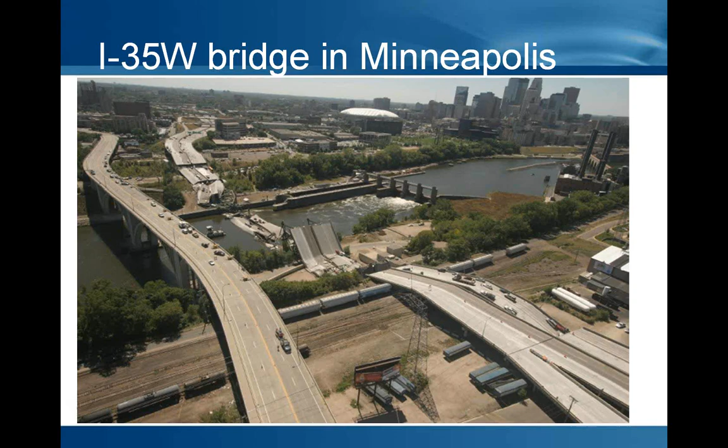Here we are, you see on the right hand side the collapsed bridge. A few numbers about the old bridge: it was opened to traffic in 1967, and was scheduled for reconstruction between 2020 and 2025. Interestingly, the first reports of damages, in this case cracking in the approach spans, are dated 1997. From this time they repaired and kept monitoring the discovered damages. During the collapse, 13 people died and 145 were injured.

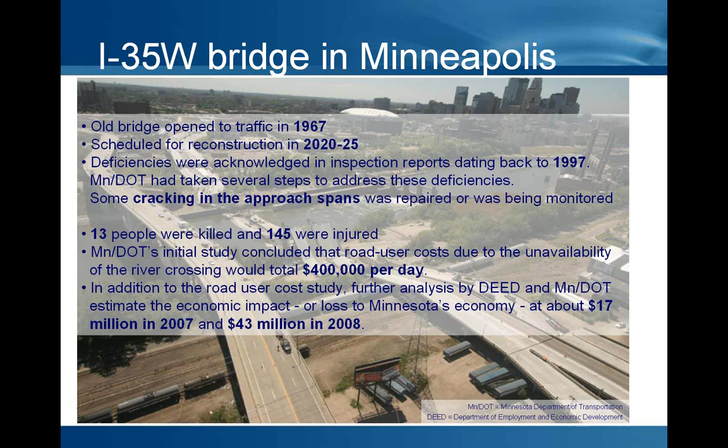The Minnesota Department of Transportation calculated a cost of approximately $400,000 per day due to non-availability of the bridge. Additionally, the Minnesota Department of Transportation and the Department of Employment and Economic Development estimated the economic losses for Minnesota's economy at approximately 17 million for 2007 and 43 million for 2008.

The next slide shows a few other pictures of the collapsed bridge, and on the top left side you see a picture of the old bridge.

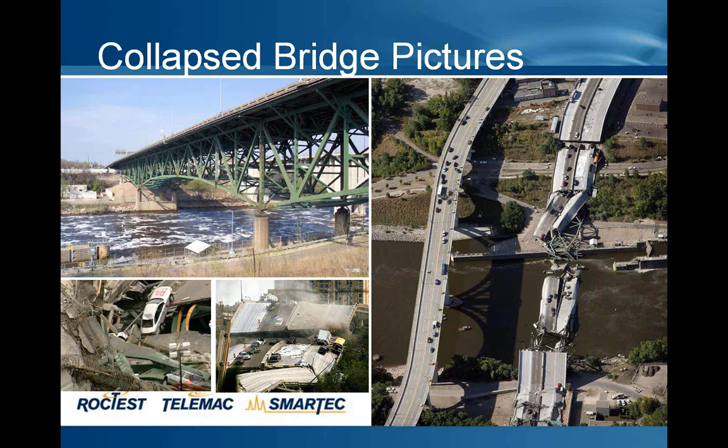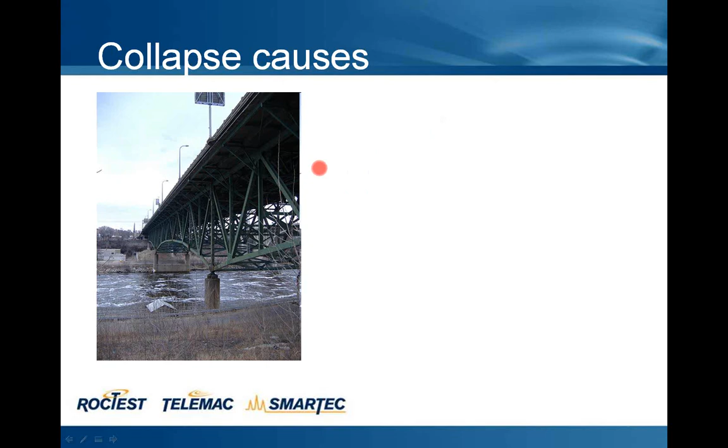Here we go. Concerning the old bridge and the causes of the collapse, the first examinations seem to identify fractures in the gusset plates as the main cause of this collapse.

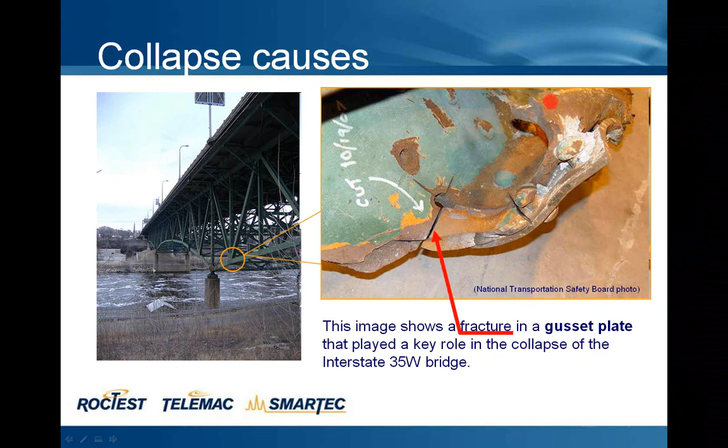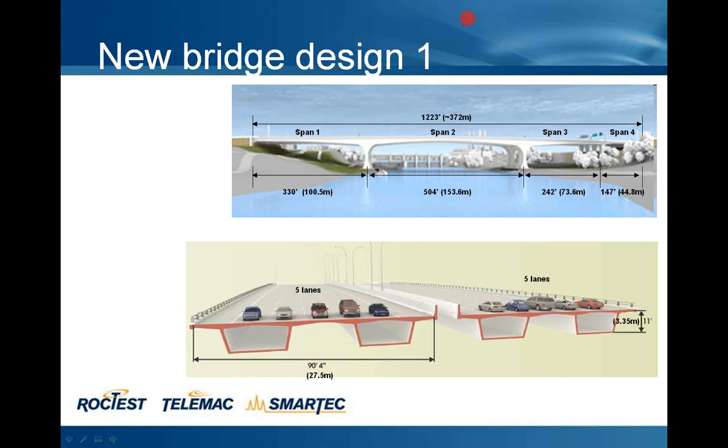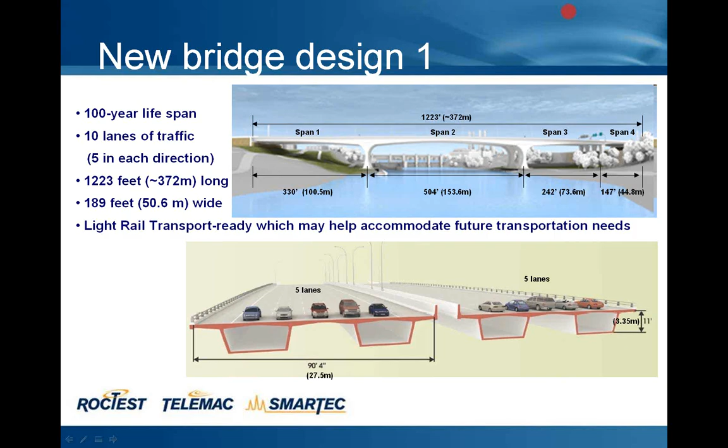The design of the new bridge started immediately after the collapse event. The new bridge foresees 4 spans for a total length of approximately 370 meters. The longest span is span number 2, with a length of about 154 meters. The new bridge is designed for a 100-year lifespan, has 10 lanes of traffic - the 2 twin bridges have 5 lanes each. The bridge is approximately 51 meters wide, and it's ready to accommodate future light rail transportation on the external lanes.

The next slide shows a few other pictures of the new bridge in the design phase.

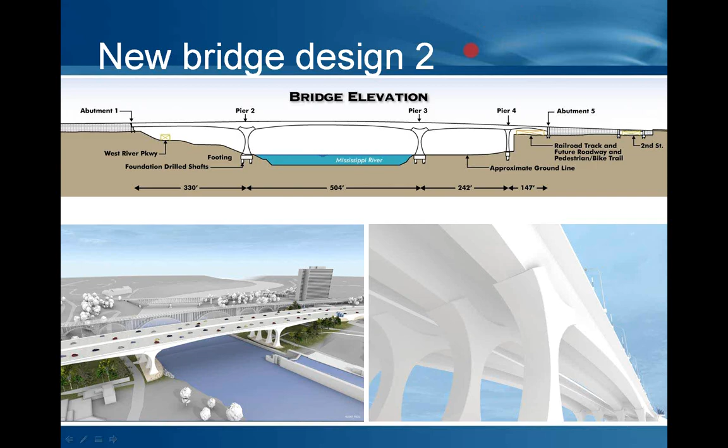As I said, the new bridge was opened to traffic in September 2008, I believe on the 14th of September. It was built in a record time of 339 days from the beginning of the project to the opening.

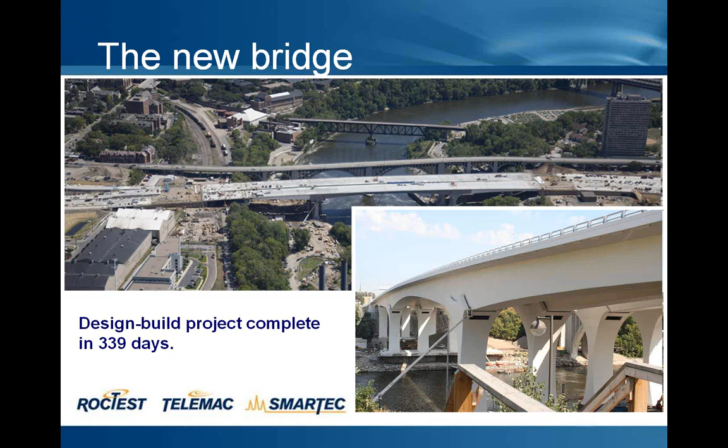It's important to note that this is one of the first examples where the instrumentation of the bridge was designed and defined since the very first design stage, with the cooperation of many different actors. In particular, all the entities involved in this construction project were also involved in the definition of the monitoring system to be installed in the bridge.

The designer, the contractor, the owner, the University of Minnesota as a research institute, and the SMARTEC group, along with a few other companies delivering and installing the different sensors and systems, worked in strong cooperation to design a system fitting the true needs of such structural health monitoring instrumentation. These needs were included in the bridge bidding proposal, in the bridge design, in the bridge executive plans, and also in the fast construction planning.

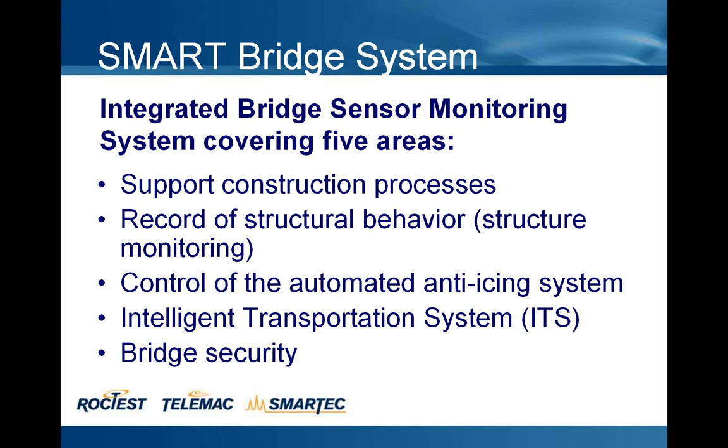So we are really talking about a smart bridge, where the sensor monitoring system was really integrated into the bridge, covering 5 different areas: the support during the construction processes; the record of structural behavior, the true monitoring of the structure; the control of the automated anti-icing system installed on the bridge; the control of the intelligent transportation system; and the bridge security.

Many different kinds of sensors were installed in the bridge, starting from strain gauges for local strain monitoring, local curvature, and concrete shrinkage and creep monitoring. Thermistors for temperature monitoring, temperature gradients and thermal strains. Potentiometers on the joints for joint movement monitoring. Accelerometers for the dynamic monitoring of traffic-induced vibrations and modal frequencies. The SenseCore corrosion sensors, presented during the first web seminar, for concrete resistivity and corrosion current monitoring.

And of course, long-gauge fiber optic sensors for average strain distribution along the main spans, average curvature, deformity shape, and detection of cracks. It's important to note that such sensors are optimized also for dynamic measurements.

Currently static measurements are performed using a SOFO V reading unit, but it will be possible in the future to scan and read dynamically the same sensors using a SOFO dynamic unit, for dynamic strain, dynamic deformity shape, vertical mode shapes, and dynamic damping measurements.

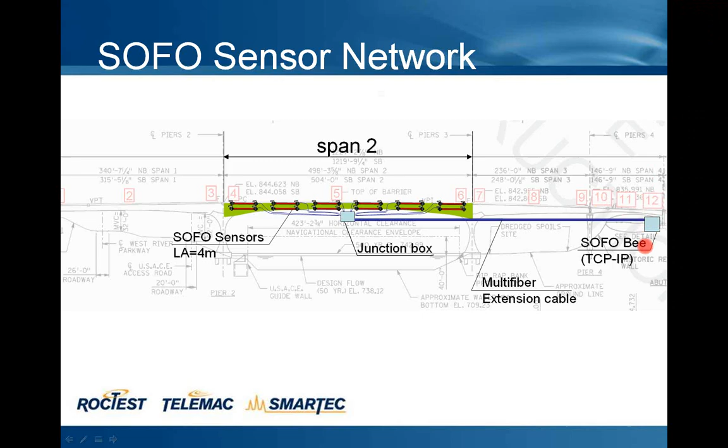All the sensors are interconnected into a junction box installed exactly in the middle of the span, and then with a multi-fiber extension cable, all the signals are pulled to the SOFO Bee reading unit located at the end of the bridge. The SOFO Bee reading unit is integrated into the local LAN, since many other sensors and systems are interconnected into the same monitoring system, so everything is connected to the local LAN. That's why the SOFO Bee is equipped with an additional TCP/IP communication module.

The sensors were protected because we installed them in the very last phases of construction, so there were many activities running in parallel. In order to protect the sensors during the installation phase, we needed to protect the areas, avoiding people stepping on the sensors. Right after installation, all the sensors were protected with ducts.

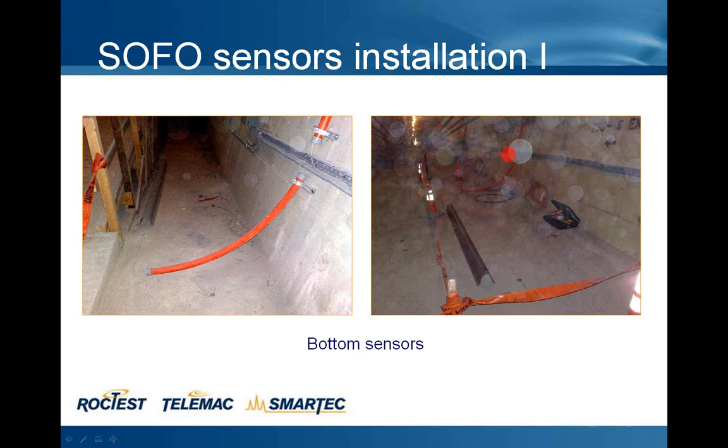All the cables, all the passive parts of the sensor cables, run along the span through ducts. Here you can see one, and here the duct. You can also see that the environment inside the bridge was very dusty.

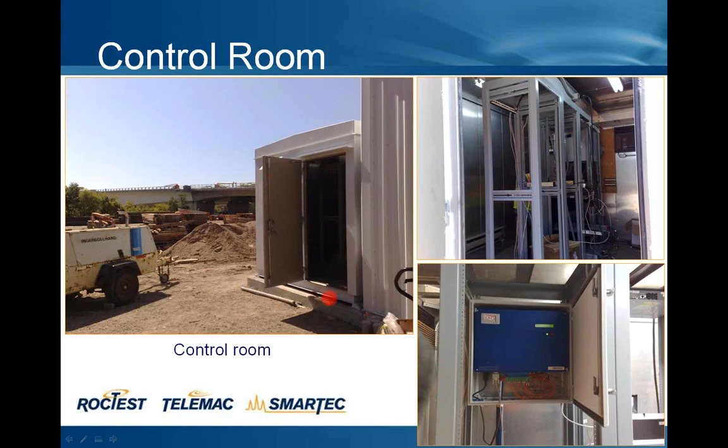Okay, so this is the small container with the control center.

All the sensors - okay, I'll answer a question that arrived. Only one bridge is equipped with the SOFO sensors. The southbound exterior span 2 is the only span equipped with the 12 SOFO sensors, while all the other conventional sensors - vibrating wires, potentiometers, accelerometers - are distributed over all the girders of the twin bridges.

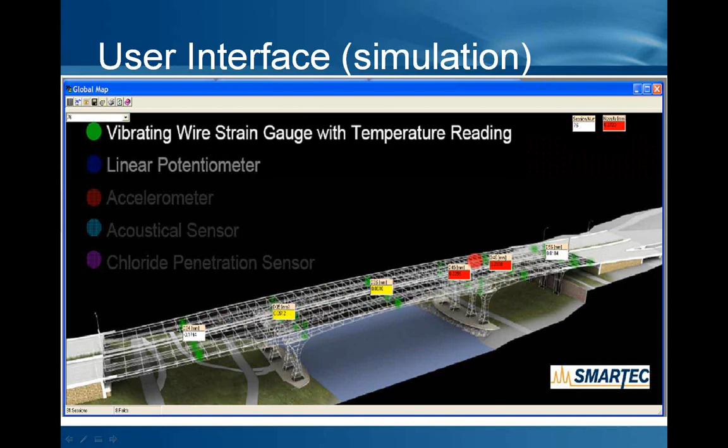All the data are merged into the SOFO SDB, and this slide shows a simulation of what the end user can see. On the location where the sensors are installed, text boxes show the real-time values of the measurements, and according to the thresholds set for these sensors, different colors mean different behaviors.

I will also show you a few results from the first day, right after the installation and before the opening of the bridge. The upcoming slide will show 6 days of continuous hourly measurements of the SOFO sensors.

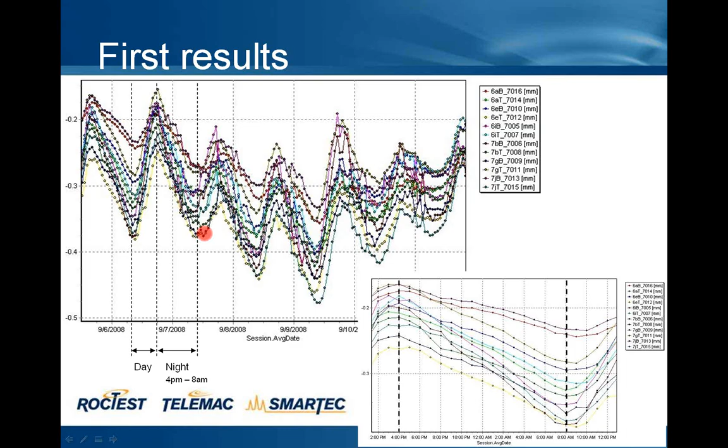Before the opening of the bridge, load tests were performed. This screenshot shows such tests, where in different steps different loads were carried on the bridge using big trucks. The tests occurred at night.

The slide first shows a downward trend of the measurements, as I mentioned before with the day-night cycles - all the sensors show a downtrend, but that's because the test was performed starting at 4 p.m. This acquisition started at 4 p.m., the test itself started around 8 p.m. and stopped at 5 a.m. in the morning. Then you see the different jumps corresponding to the different loads on the bridge. Just note the scale - this is 0.1 millimeters.

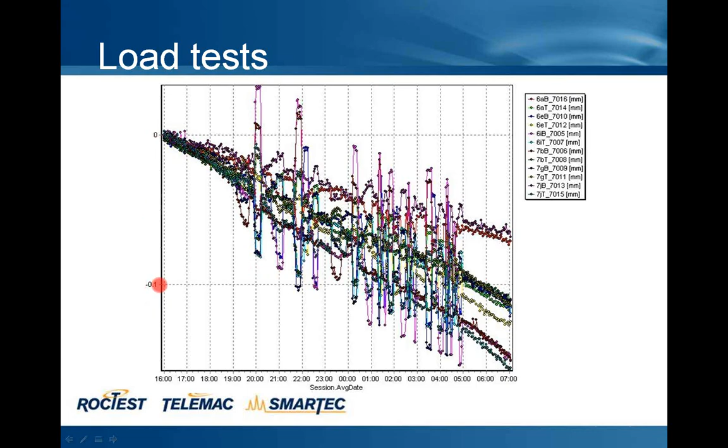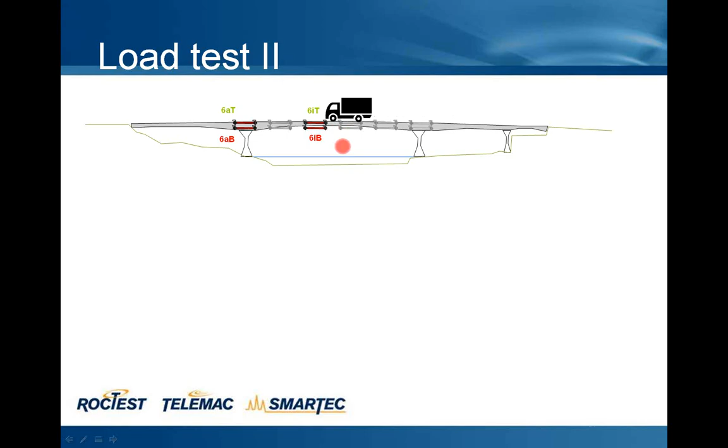Concerning the load test, the next slide shows a side view of the bridge. Here I've put all 12 sensors, but we just focus on two couples: the 6A top and bottom near pier number 2, and the 6I top and bottom approximately in the center of the span. During the load test, different loads were applied on the bridge, and the bridge reacts to this load with a kind of deflection in the mid-span.

This means that, as expected, the top sensor on the pier should get tension while the bottom sensor should get compression. On the other hand, in the center of the span, the top sensor should get compression and the bottom one should get tension.

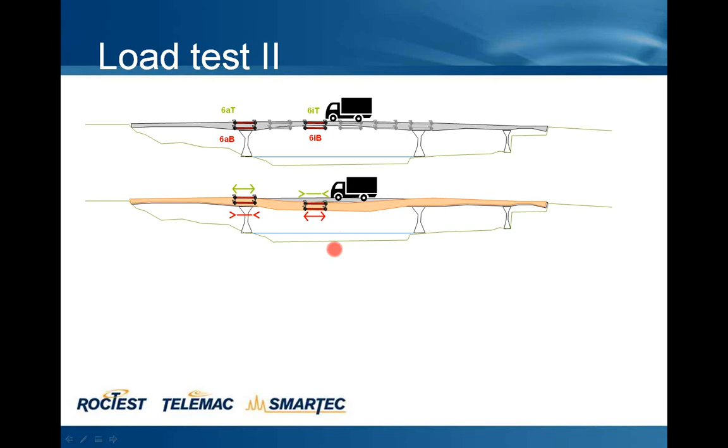And in fact, zooming and focusing on these four sensors, the measurements taken during the load test confirmed this expected behavior. Again, we're talking about very small deformations here - much less than 0.1 millimeters.

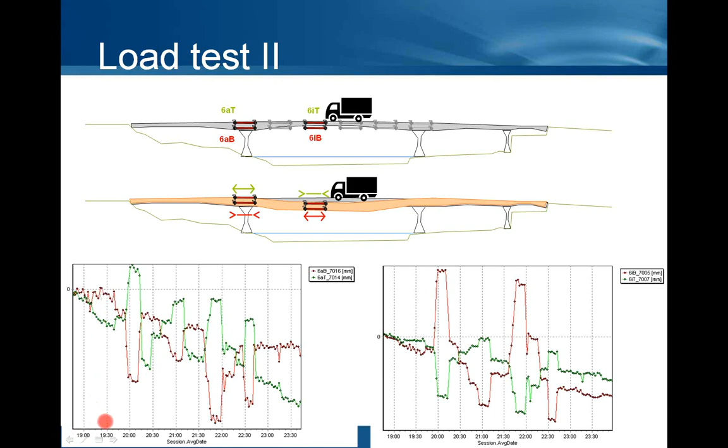So I'm going to end the presentation of this first case study with a few acknowledgements: the Minnesota Department of Transportation, the Flatiron Manson Corporation, and of course the University of Minnesota, which will be responsible for managing the measurements and analysis of the results.

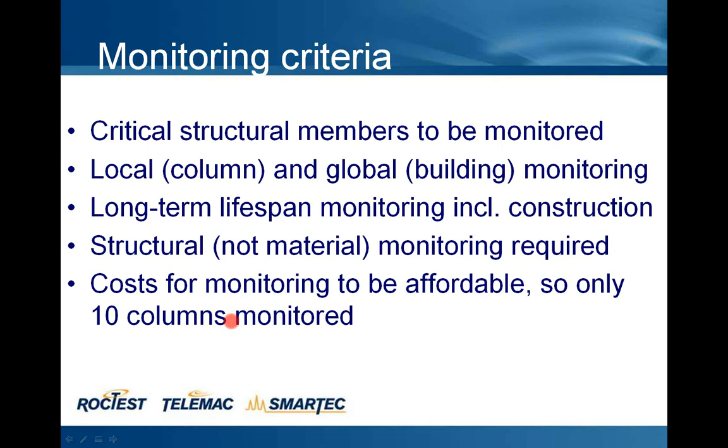In order to keep the costs affordable and low, without affecting the performance of the monitoring system, it was decided to keep only 10 columns in the building. Those columns were selected by the designer of the building as the most critical elements of the structure.

The Punggol complex consists of 6 blocks founded on piles. Here you can see the building in progress, under construction. Every building has 19 stories and 6 units per story. The columns, in the case of Punggol, were cast on site.

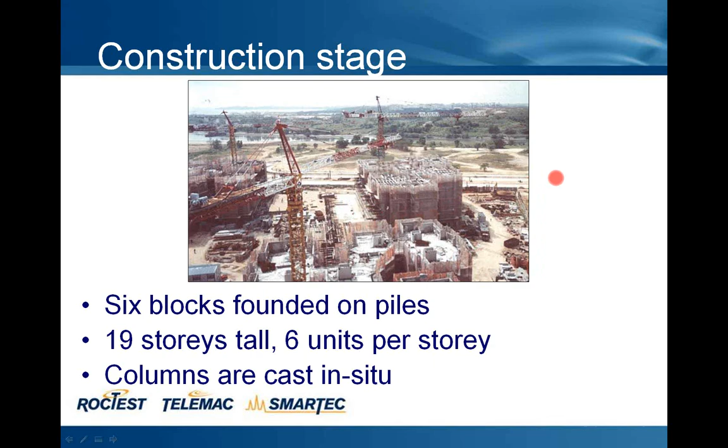But for some other projects, the columns were also produced in the plant, in the prefabrication plant.

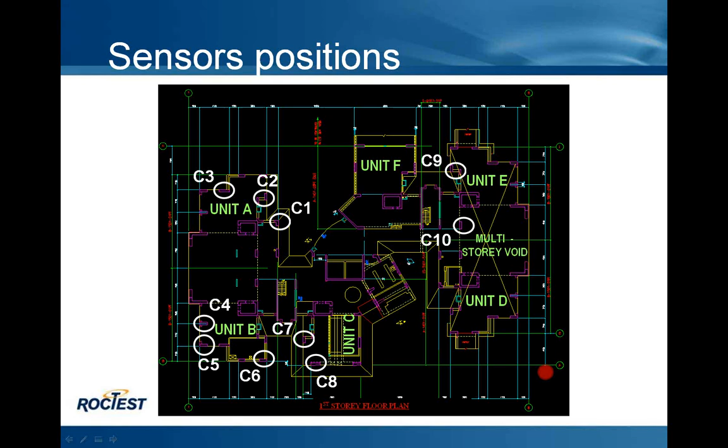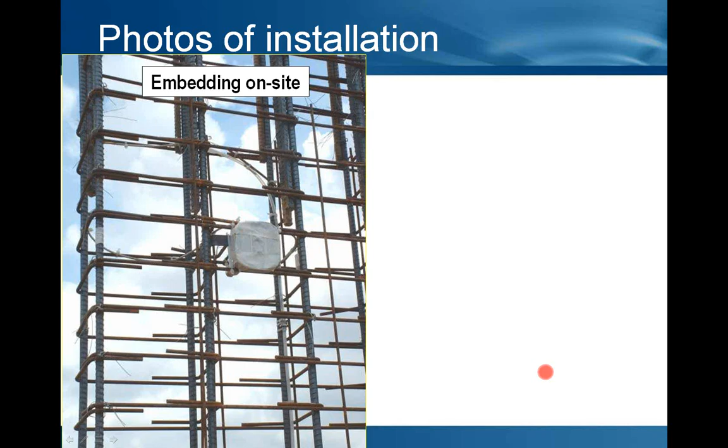A few photos of the installation. As mentioned, here we have the cast-on-site columns, so the sensors were installed in the rebar cages. You can see the SOFO sensor installed on the rebar, then the passive zone going around, entering the junction box. The junction box was protected since it was also embedded inside the concrete.

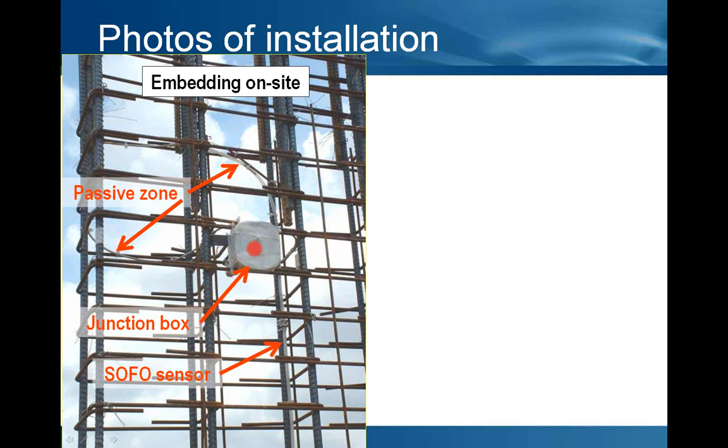As mentioned before, we also have some sensors embedded in the prefabrication plant. The manner of installation is practically the same as shown on the left side photo — it's just that the sensors were attached to the rebars in the plant, then after concrete pouring they were transported to the site. So after pouring, you could see only the junction box with a small window for the connector, and when a measurement was to be taken, this window could be opened and the connector from the SOFO reading unit plugged in.

Like this, we could perform the measurements, which were actually manual measurements. On this project, it was decided, in order to reduce cost, to perform the measurements manually. So campaigns of measurements were performed at regular intervals, but not continuously — every time, someone had to go on site to open this small window, plug in the connector, and perform the measurement.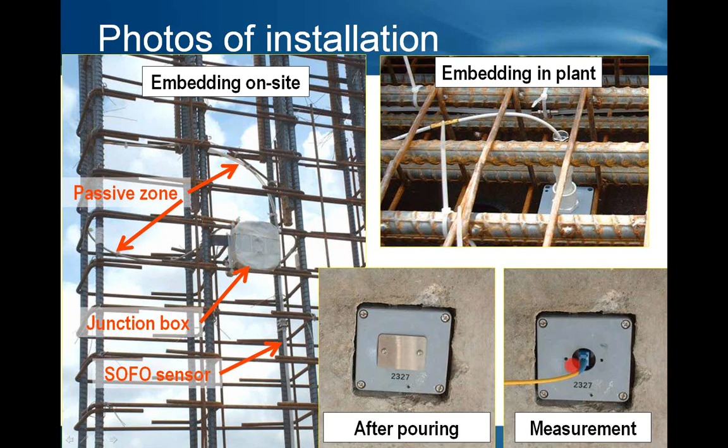Okay, so in the last photo you can see the connector coming from the extension cable from the SOFO, which is plugged inside the junction box. In the next slide, you will see how the completed buildings look like.

So obviously when the buildings are done, they look nice. You can see the blocks of Punggol, and you will also see the operator of SMARTEC's distributor in Singapore, SOFOTEC, performing the measurement on one of the buildings. These are very nice, modern buildings, 19 stories tall. On the right photo, you can see the SOFOTEC operator plugging the sensor inside the box and performing the measurements manually.

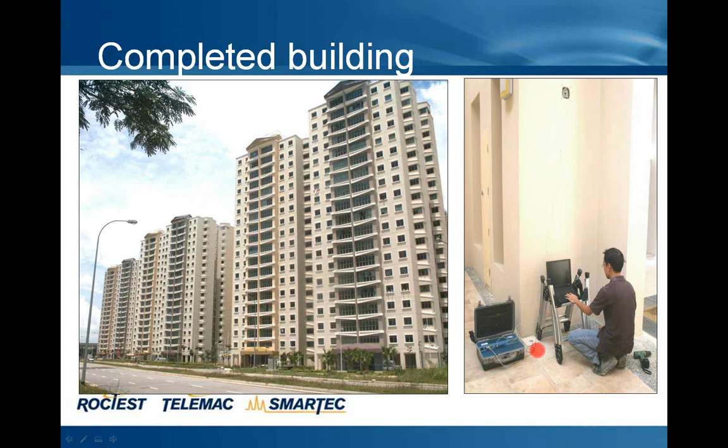So the next slide will show the 7 years of results. This is a very interesting slide showing different stages of the building life.

That's what we expect to see in this diagram now appearing on your screens: during the construction stage we have compression in all the sensors, and it's good to see that most sensors measure practically the same value, or nearly the same value, which indicates that the building is progressing well. That means all the columns are deforming in the same manner.

So for every new story added, one measurement was performed, and this indicates that all the columns settled, deformed, and compressed by the same value - except one column, column C9, which I mentioned at the beginning of the conversation - this void area where the sensors are less loaded because there are fewer stories with apartments.

So once the construction is finished, practically all of the load is inserted into the columns, and what we see evolving over time is mostly rheological effects like creep and shrinkage.

We can see that all the columns continue to deform, but now their values start to be more scattered. At the construction stage they were very close to each other; now they start to be far from each other.

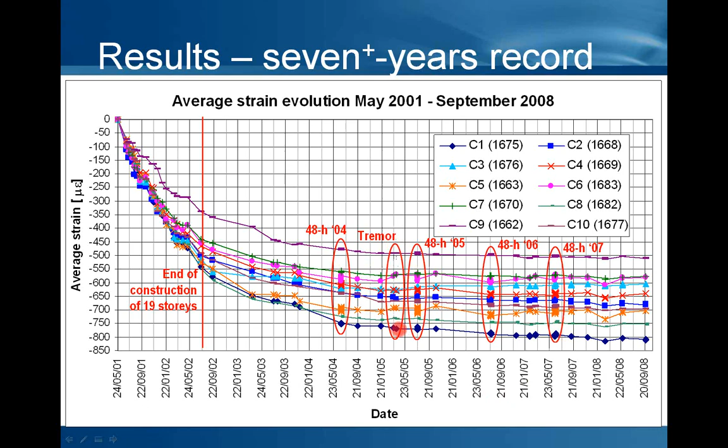And here, in between two 48-hour measurement sessions, there was a tremor that happened due to an earthquake in neighboring Indonesia, and we were able to catch this event and make a post-tremor evaluation of the building. People in the building actually could feel the movement. They called the authorities and asked for an opinion, and we were able, based on our measurements, to give answers about the health condition of the building.

So at the local level, first we made the data analysis based on the fact that sensors measure axial deformation in the columns. We were able to determine the measured strain in the column, and then evaluate whether the strain is acceptable by comparing the measured strain with the estimated value from design. We were also able to compare the measured strain with the ultimate values that are expected.

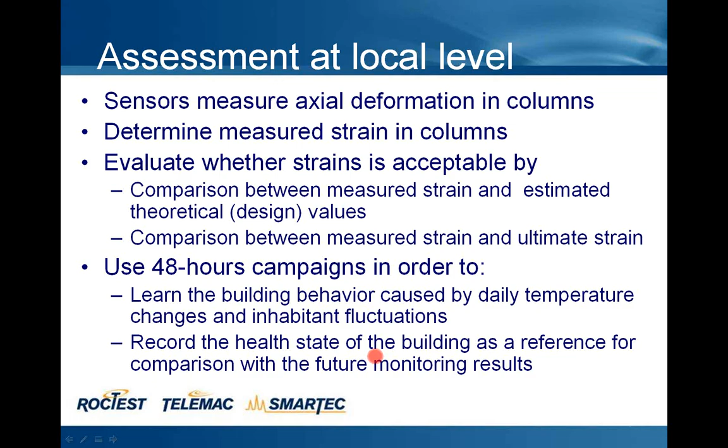We also used the 48-hour campaigns to learn the building's behavior caused by daily temperature changes and inhabitant fluctuations, and to record the health state of the building now, while it is in good condition, to use this as a basis for the future.

So average strain measurement by sensor, using a simplified formula, can be expressed as total strain measured by the sensor equals strain due to the load, or elastic strain in case we are not in the plastic zone, plus creep, plus thermal strain, plus shrinkage.

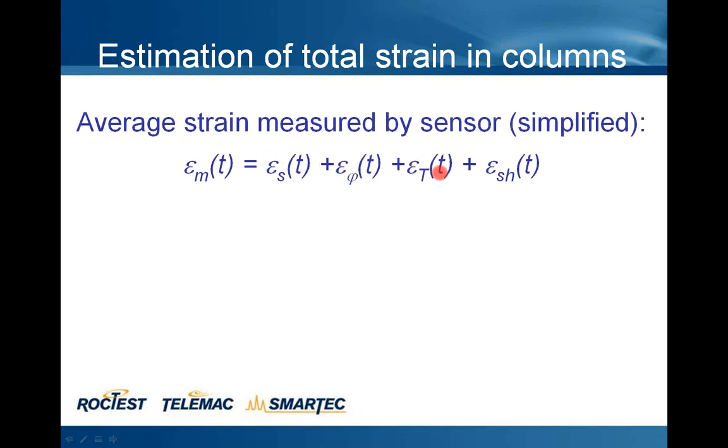It's a kind of simplified formula that applies very well for concrete. In our case, we have thermal strain, total shrinkage, creep, and elastic strain, or strain due to the load.

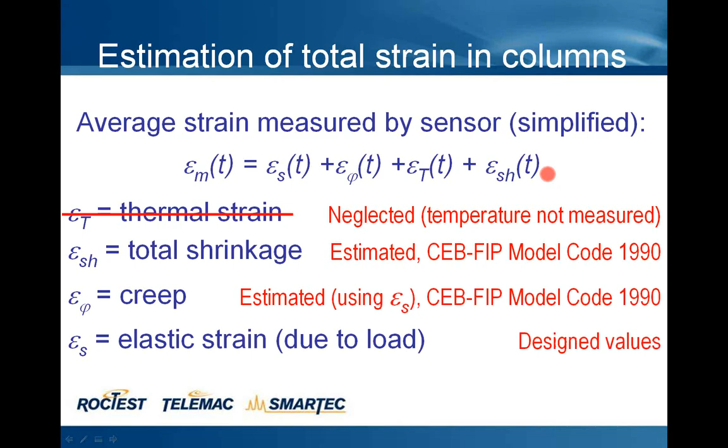In our case, thermal strain was neglected because, as I mentioned, temperature in Singapore was more or less constant, so it was not measured. The total shrinkage was estimated using the CEB FIP model code, and creep was estimated using the same model code. Finally, we used design values for the elastic strain, so practically we were able to reconstruct what is expected, what is designed, and compare that with what is obtained from the sensors.

In the next slide, I will show two comparisons for two columns, C3 and C9, with approximate lines for the first 4 years of monitoring. For column C3, the first line on top is the estimation of shrinkage, then estimation of creep, then estimation of elastic strain based on design, and here you can see the line with the rhombs, that is the theoretical estimation of the total strain evolution, while the measurement of the sensor is presented with the dashed line.

You can see that for this particular column, in the first stage, we had very good agreement between the numerical model and the measurement from the sensor.

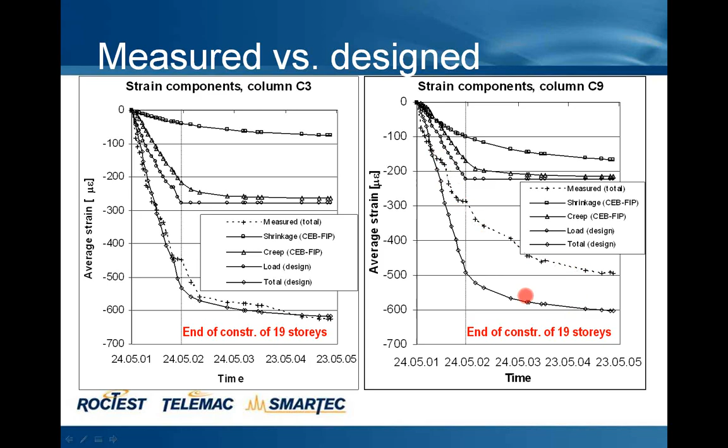But not to show the best example only, let's see another example: column C9, where we measured less deformation than expected. In this case we could clearly see that this column measured less than expected, and probably this column is either over-designed or underloaded. The explanation was found in the fact that there is a void area around this column, and also this column is very close to the core, so it is possible that the core of the building, being much stiffer, is attracting more loads to itself.

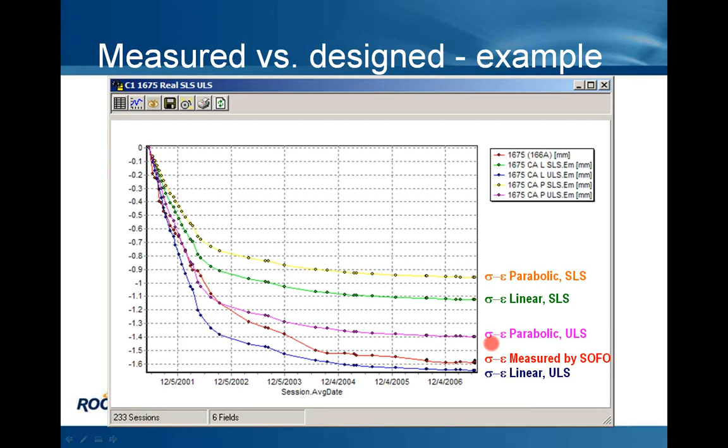The next slide is a 48-hour measurement from 2004, where we can see the fluctuation over 2 days in strain and temperature. Here with the ROMs you can see the fluctuation of strain over 48 hours, and here the fluctuation of temperature. The temperature fluctuation is really very small, and also the deformation is really small, we're talking about less than 20 microstrain all in all.

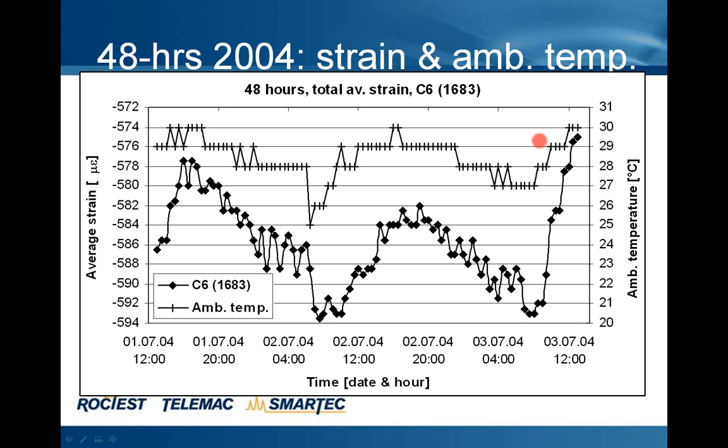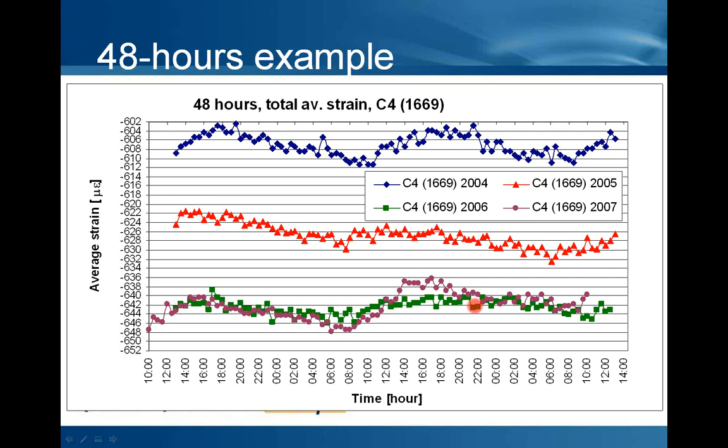Another 48-hour example compares year to year within one sensor, showing the daily fluctuations in 2004, 2005, 2006, and 2007 on the same sensor. In 2004 we have daily fluctuation in the blue line. The year after, we have practically similar results, but the whole line is shifted down because of creep and shrinkage. The same happens the year after, but in the fourth year we have nearly the same measurements as the third year, so the creep and shrinkage are more or less stabilized and don't evolve anymore in a significant manner.

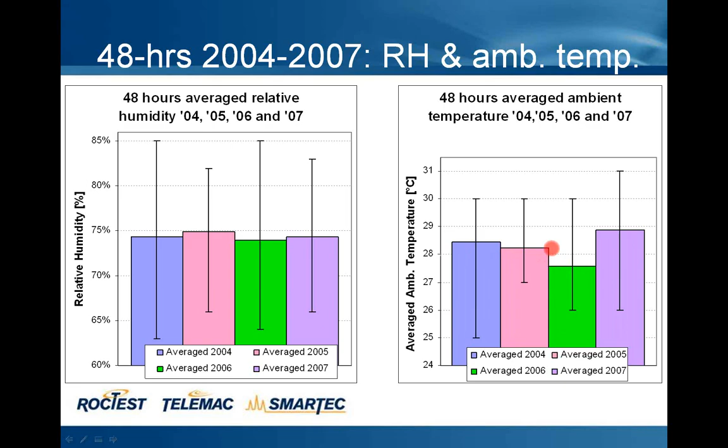I'll jump to the slide showing environmental behavior around the building: the relative humidity and the average ambient temperature, along with maximum and minimum values. Average humidity is nearly the same all 4 years of monitoring, and temperature is also more or less within the same limit, about 28 degrees plus or minus 0.5 degrees average value, so we have pretty constant conditions around the building. Then it was very interesting to see the evolution for every single column, and here we can already see some anomalies in the behavior.

For example, if you look at column C3 presented here, we can see that from year to year the value of the strain in this column is actually decreasing in terms of absolute value. So this column is decompressing, while some other columns are much more compressing, like column C1 and maybe column C2. Some columns are pretty stabilized, for example column C4.

Some of them have big fluctuations depending on temperature, like C6. So you can practically see for each column what is the behavior. Now we'll focus more on column C3 that actually has, let's say, the negative behavior.

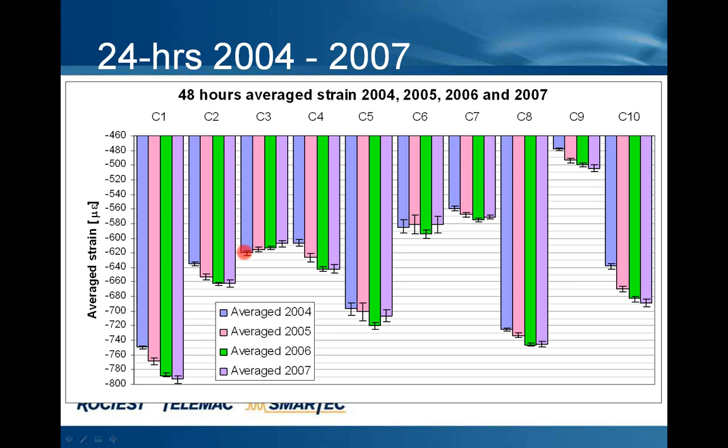We expect the strain to increase in time due to creep and shrinkage, but the strain in this column is actually decreasing. But before we go there, I will just quickly show you the post-tremor analysis that we performed.

As I mentioned, in neighboring Indonesia there was a strong earthquake that was felt as a tremor in Singapore, and we had one measurement performed before the tremor and one performed just after the tremor.

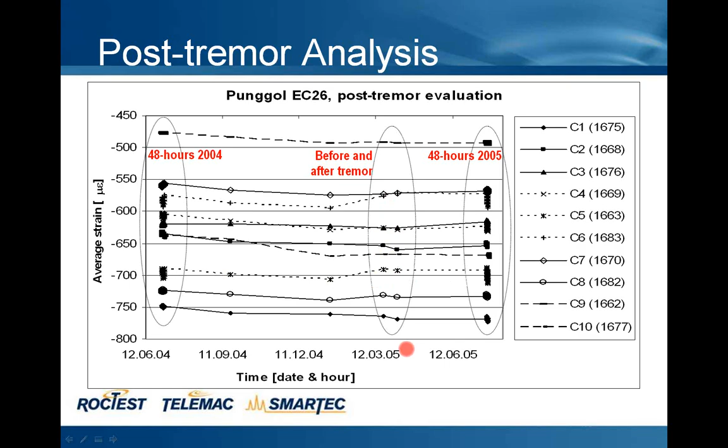We could see that there were small changes detected by the sensors between before and after, but those changes, if you compare with the daily fluctuation in year 2005 and in year 2004, we can clearly see that those small changes are actually within the limits, and we can practically conclude that there is no damage or any influence of the tremor on the behavior of the buildings.

So now we are going to make an assessment on the global level. I will go back to this column C3 that was, let's say, problematic.

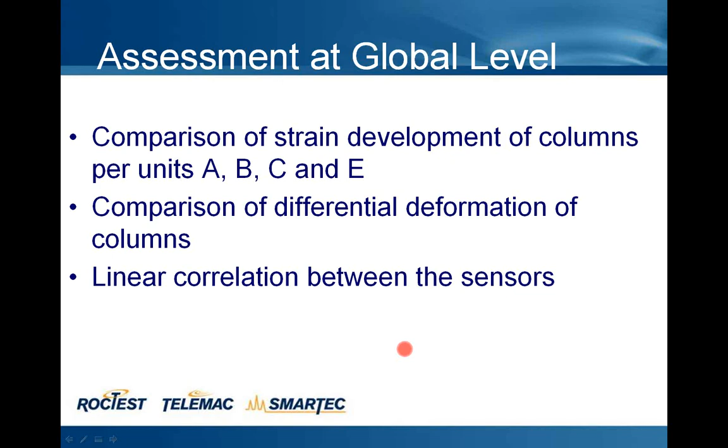What we do is comparison of strain developments in columns per each unit, comparison of differential deformation of columns, and linear correlation between the sensors. Before, we already mentioned that column C9 measured less strain than the other columns.

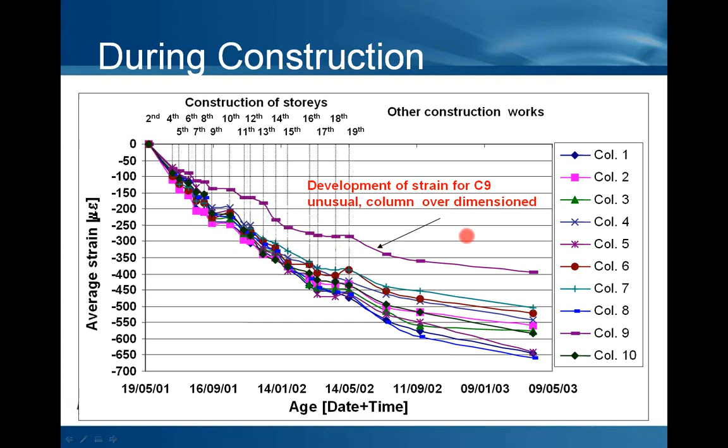If you zoom in just during the construction phase, we can clearly see that this column measures strain which is proportional to the other columns, but by absolute value it is much smaller. So it was judged that the column is overdimensioned for the area where it is, and it helps improve the design of the structure.

Then if you perform the linear correlation in the long term between neighboring sensors, for example here we can look at unit B, which consists of sensors C4, C5, and C6. We put on the x-axis sensor C4, and on the y-axis we put the other sensors.

You can clearly see that there is a linear correlation between the sensors, and this is actually what is expected to happen in a building. So if you have vertical compression in the columns, then you expect all the columns to act in linear dependence to each other.

But in some cases this is not fulfilled. In some cases we don't have really linear dependence, and this is the case of unit A. Now you will soon see on your screen the diagram of linear correlation for unit A. In this unit, it is very obvious that there is no linearity between the behavior of the columns.

I'm just waiting so that all of you can see this diagram. I'm sorry, but it seems that the network is a little bit slow now. Okay, now you can see it.

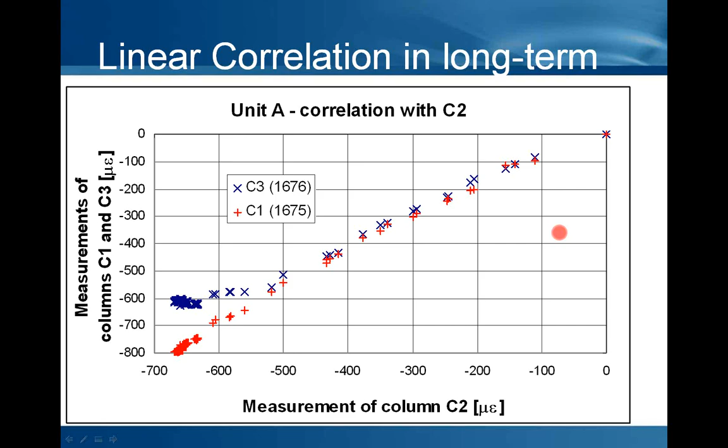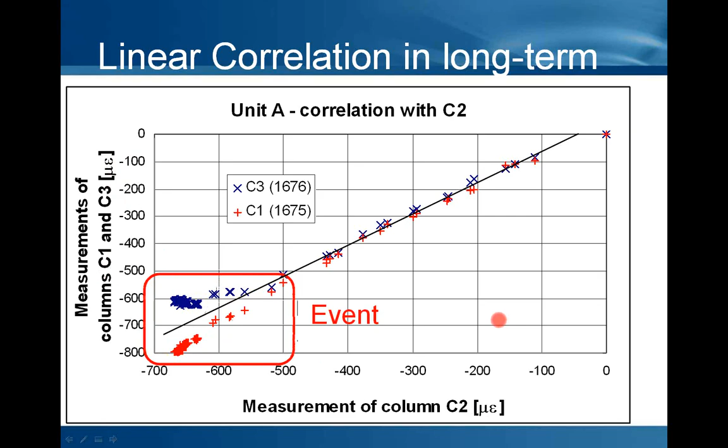Here, obviously, there is no linearity between column C2 and the two other columns, C1 and C3. So in this area, you can see that we detected some event, so something happened there. What actually happened, and what you expect happened, is settlement of column C3.

Because now, if you plot the diagram showing only these three sensors in the long term, you can see that C1 measures something bigger than expected. If you see this line, how it is going down, it is really much down. And C3 measures something smaller than expected, because up to here it was developing well, and then suddenly it became pretty constant. From this point on, we even see a kind of tension appearing in this column.

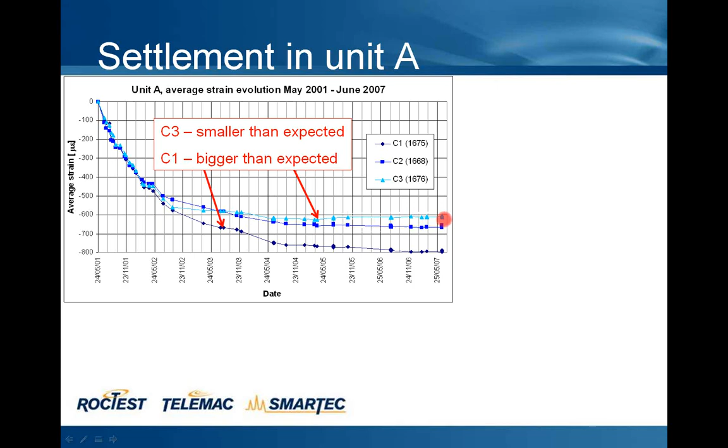So we did some very approximate analysis using some very simple numerical models in order to try to estimate how big the settlement is in this column that provoked this change in the diagrams.

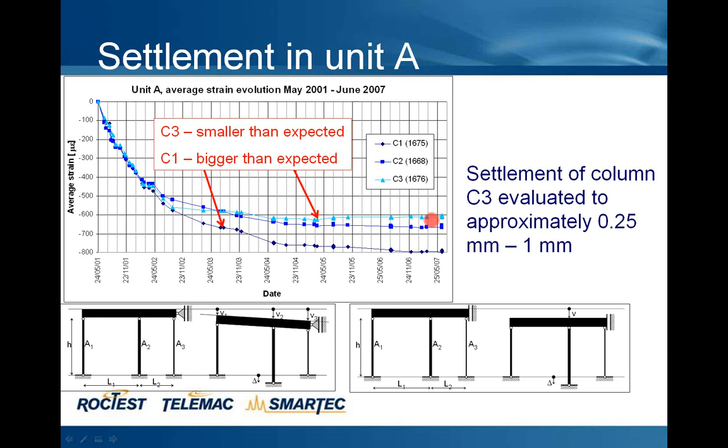Here you can see the models that we used. We could see that the settlement of column C3 was evaluated to be approximately from 0.25 to 1 millimeter. That means this event is not really dangerous for the structure, but it shows how sensitive the monitoring system is, since it was able to immediately detect this type of anomalous behavior.

Now we will see some other interesting thing that we get out from monitoring. Since the Punggol blocks were composed of different buildings, we compared two buildings to see the behavior, and we could see that in two buildings built on the same site with the same contractor and same type of concrete, the sensor measured approximately the same value. So you could also use the system as a quality control of the construction of your building.

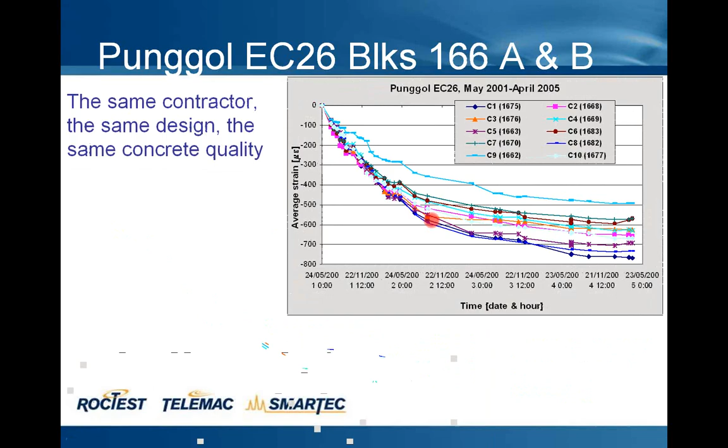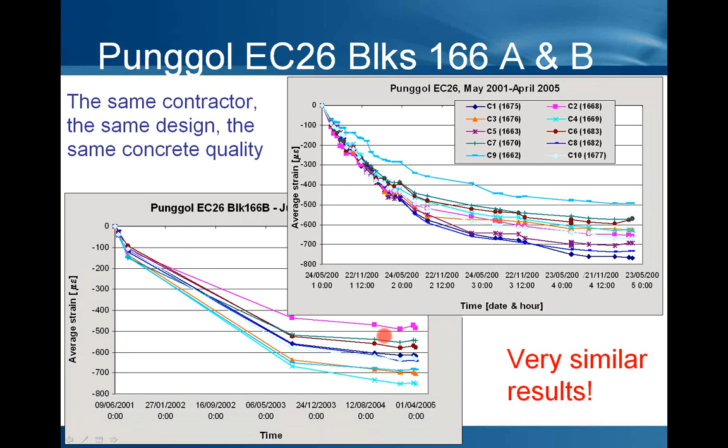Okay, so here you can see one building, and here you can see the other building, and if you look at the values, here it is between let's say 500 and 800, and here is the same, between 500 and 800. So we can say that we have very similar results.

As conclusions, we can say that the detected overdimensioning of the column C9 will help designers to improve modeling. We can say that we detected differential settlements in the columns with very small magnitude, so it doesn't really influence the performance of the building.

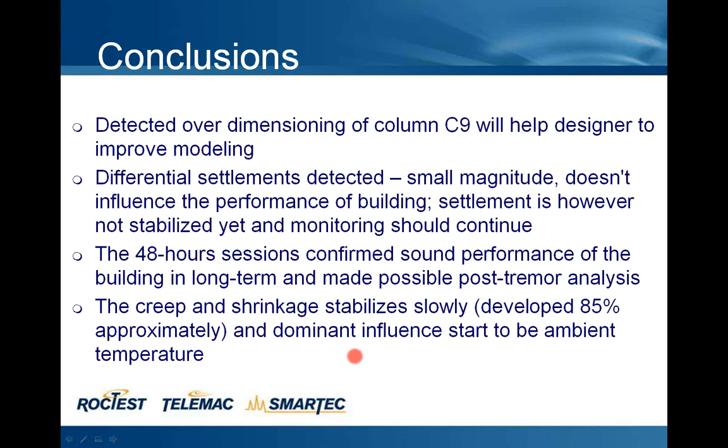But the settlement is, however, not stabilized yet, and the monitoring should continue long term. The 48-hour sessions confirmed sound performance of the building long term and made possible the post-tremor analysis. The creep and shrinkage stabilizes slowly, and now they have developed approximately 85%. And from now on, the dominant influence starts to be the ambient temperature.

So the Pioneer Monitoring Project for a Singapore high-rise building was presented with more than 7 years of long-term monitoring. We had very successful monitoring, and we were able to register important stages in the structure's life. We enlarged the knowledge concerning the real column behavior during construction, including the rheological effects.

In spite of limitations such as not monitoring temperature or no continuous readings, results lead to important insights of actual structural behavior. The monitoring strategy was developed and successfully applied. The monitoring system SOFO was properly selected and fully responded to design criteria.

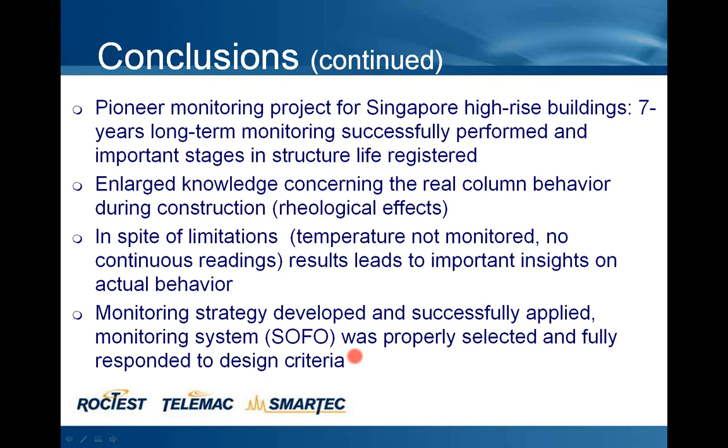I must mention that here we have, for example, 10 sensors installed in the building, and after more than 7 years, we still have all of them functioning properly. So the use of fiber optic sensors on such a large scale set directions that will help designers better understand the behavior of tall buildings during its life cycle, from construction to service conditions.

And this project is presented in detail and used as an example in our book, Fiber Optic Methods for Structural Health Monitoring, that is available at SMARTEC.

So now I'm ready to answer some questions that you asked.

So the question that I have is that in a project where we cannot afford to install sensors on all columns and install only on chosen columns, is it advisable to prioritize installing sensors on certain columns, such as the 4 corner columns and so on?

So here the answer is that the best way to choose the columns in which to install the sensor is based on the design. It will be important to see what columns are strategic, what columns are the most important, what columns are the most loaded, and to choose those columns to be equipped with the sensors. Sometimes, when we speak about reinforced concrete, the performance depends on the dimensions of the columns, but also on the quantity of rebars that you have inside the columns.

It is very important. If you don't have the design available, then we can try to find out by engineering experience what columns can be the most critical ones. But still, the best manner to choose the columns to be equipped with the sensor is to make your decision based on the design.